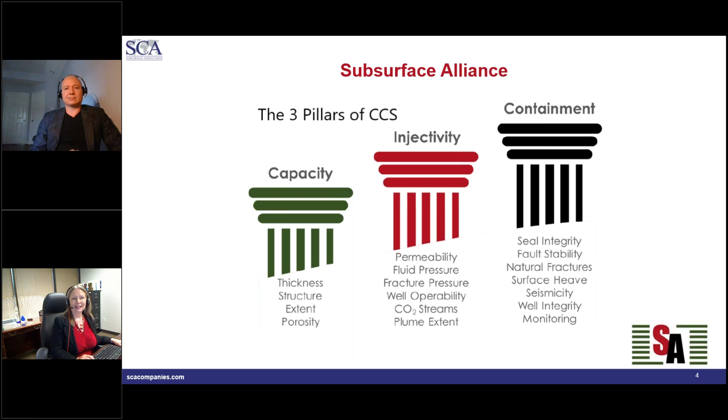Dr. Araujo represents the Subsurface Alliance, and he'll be speaking today on the 3 pillars of carbon capture and storage: capacity, injectivity, and containment. Subsurface Alliance is a network of subsurface specialists who have worked together and today offer comprehensive subsurface solutions in a team-of-teams approach. In this case, we'll be talking about CO2 storage, but there may be other topics related to geomechanics in which you'd like to employ their expertise.

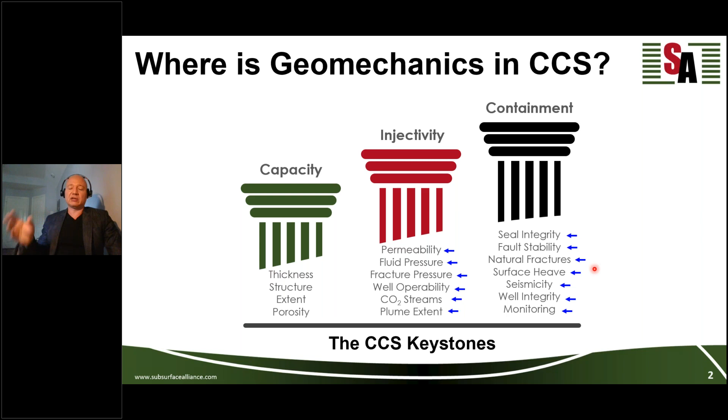So to give an idea of the guidelines or recommendations: in the United States, the EPA, or Environmental Protection Agency, has established in its 2013 document for Class 6 wells some recommendations and requirements, which are actually the most strict when compared to regular oil and gas wells.

For example, there's a topic, 2.3.6, on geomechanics characterization and what type of data to collect. They mention a lot about fractures - how you detect them, how you should characterize them. You should have a good understanding of your rock deformation and strength, because operations you're doing will increase pressure and change temperature, and these things put the rocks under stresses that can become excessive.

If it becomes excessive, we're going to go into a rock failure, and we don't want that scenario. So the in situ stress field is a primal type of geomechanics feature, because without the geomechanics in situ stress field, which is the vertical stress and the two horizontal stresses, we cannot really do the calculations that are required in geomechanics, like the cap seal integrity, the fault stability, the well integrity.

So we need to understand the in situ stresses, which includes also the pore pressure, not only in the reservoir, but also in the cap rock. So here are the EPA guidelines, and I'm sure all the countries have similar, different, or maybe more restricted recommendations. When it comes to that type of data required to characterize every single element of the geomechanics model, the EPA also provides a good list of data and modeling that should be done and carried to be included in the permitting process of a CCS project.

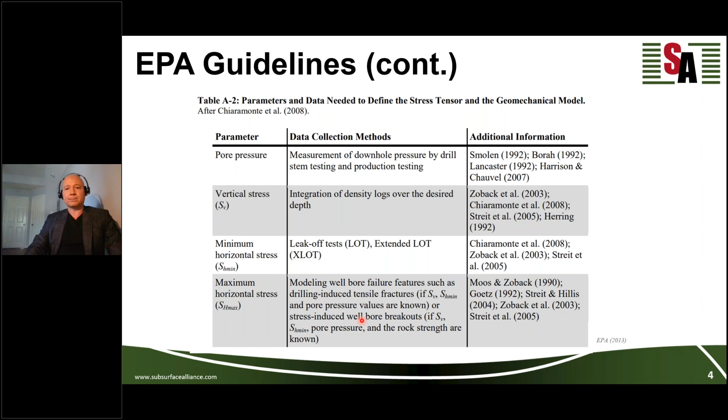And if your reservoir is not extensive enough, you're going to start seeing an increase in the pore pressure. Also, the CO2 comes down with a much cooler temperature than the in situ temperature of the reservoir, and that's going to create a cooling effect. That combination of increasing pressure and decrease in temperature is going to add up to the in situ stresses.

That can create excess stresses that can put the rock at the probability or feasibility for failure in both tensile, which can be a fracturing formation. Usually you can see that it's starting near the wellbore, but it can also start away from the wellbore if you have, for example, a faulted region or naturally fractured region, and that can be facilitated by this increasing pressure.

And if you have minor faults that are really maybe not even visible in the seismic data, for example, and those faults get activated by the increased pressure or decrease in temperature, you can have migration outside of the reservoir into the cap rock, or maybe at the shallow formations where you may find some ground potable water, which is not really desirable.

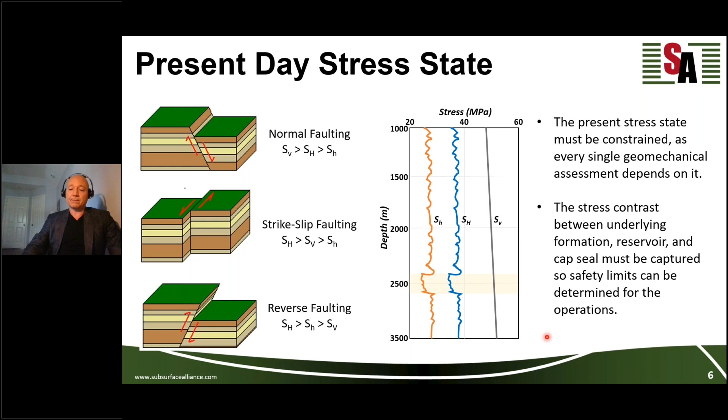Also, and very important, if we are going to do CCS in depleted reservoirs, we need to understand how much the pore pressure is right now and how much it was in the beginning before that field, that reservoir, was depleted, because this delta P in time has created delta stresses which we need to account for. So we're going to start operating a reservoir that's not at virgin conditions anymore, and we need to understand that.

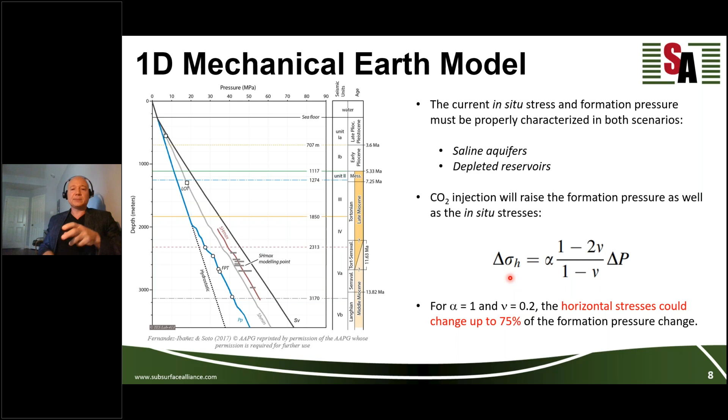Maximum horizontal stress orientation is usually determined by looking at borehole image data like FMIs or other types of image data, where you can identify borehole breakouts or drilling-induced fractures. This is very established technology in the oil and gas industry, and most wells today collect this data - not exactly for the purpose of geomechanics, but we take advantage of its availability to find out about the stresses.

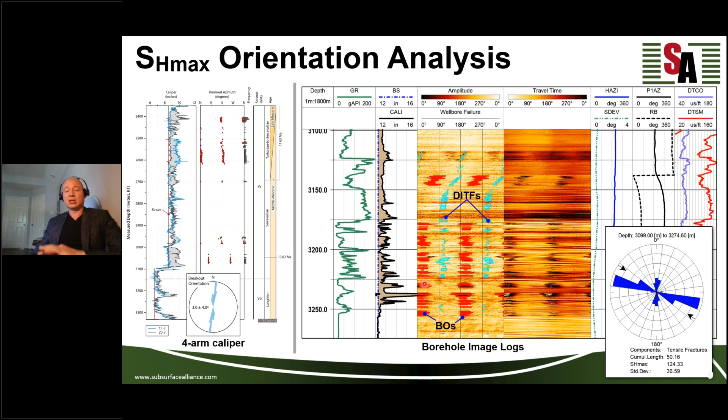For example, this is the orientation of the maximum horizontal stress given by the orientation of tensile fractures that have been observed here, and also the breakouts, which are 90 degrees apart from the orientation of the drilling-induced fractures.

Looking into the rock mechanical properties, we need to understand how these rocks are going to deform, and ultimately what is the maximum strength that these rocks can exhibit once we are making changes down there in the subsurface.

Usually we take core pieces of rock to the lab, and we simulate there in the lab a loading stress on those little plugs or samples of the rock, matching the expected range of stress we're going to see down there in the subsurface. And then we determine how strong that rock is.

So this is something that a good project should extract core for - geological properties of determining porosity, permeability, but also the mechanical properties.

However, not only the rock in its in situ condition matters. If our primary rock in the reservoir is going to intake the CO2, we may have changes in the composition of the material because the CO2-brine environment creates an acidic situation. That acid may start destroying the cementation between grains, which will result in reduction of the strength of the material.

That excessive pressure created a scenario for fracking the well unintentionally, and that fracture became uncontrolled to the point that it somehow connected to these major faults. The faults and fractures combination found a way to propagate and reach the sea floor, because the excess pressure at that depth was enough to reactivate the fault and propagate all the way up to the sea floor.

If I may play this video, you see a very nice ROV image when you drop the robot to capture it. That's the signature of the fracture at the sea floor, and what you see are bubbles of oil coming from that fracture. This is the result that by the end of the next day, you can really see a sheen of oil floating around in the ocean.

So we don't want that scenario, because if our intention is really to keep our CCS safe and with high integrity, we need to keep the CO2 down there in the subsurface. We cannot allow for this, because it would compromise the main objective of the project.

Speaking of a real case here of a CCS project, this project called In Salah is in Algeria, in Africa. It's a well-known project. There are dozens, maybe hundreds of publications on this project, not only geomechanics but many aspects. But you can find a good chunk of geomechanics, because there are features and situations that have been extensively studied.

For the purpose of having context on how we sit in relation to the geomechanical environment, we are under a strike-slip faulting regime, where the vertical stress is our intermediate stress, and there is a great stress anisotropy in the horizontal plane. The direction of the minimum stress has been characterized as northeast-southwest, and here are pretty much the magnitudes that some of the studies have put together to come up with those numbers.

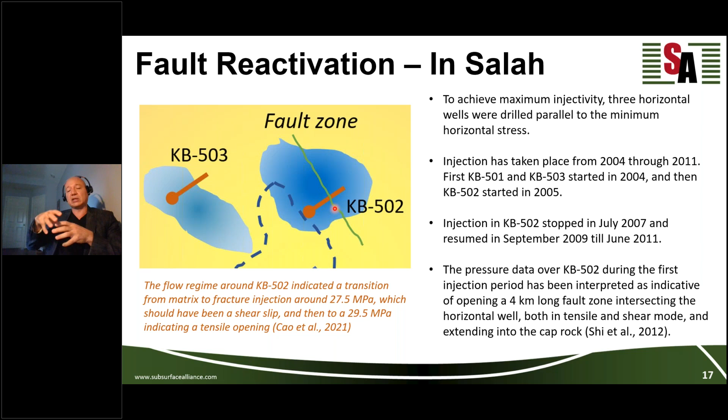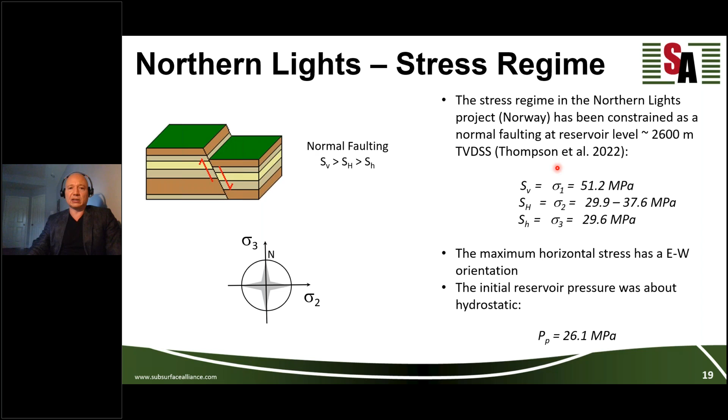The authors of this study were really concerned about the thermal stress impact on the operations for the lifetime of the field. So what they did was a finite element simulation that coupled the thermal-hydro-mechanical process, in other words, temperature, pore pressure, and stresses together.

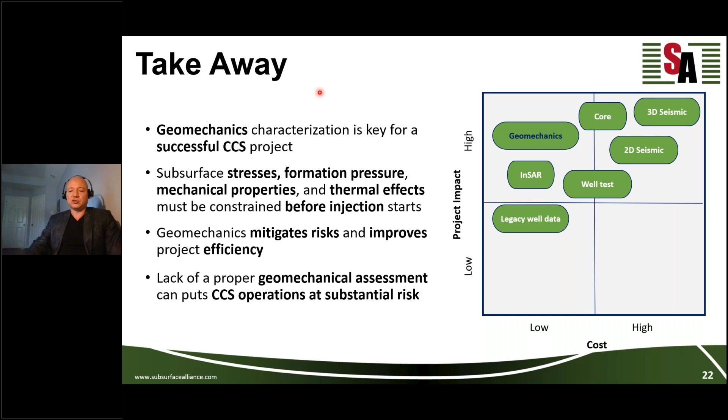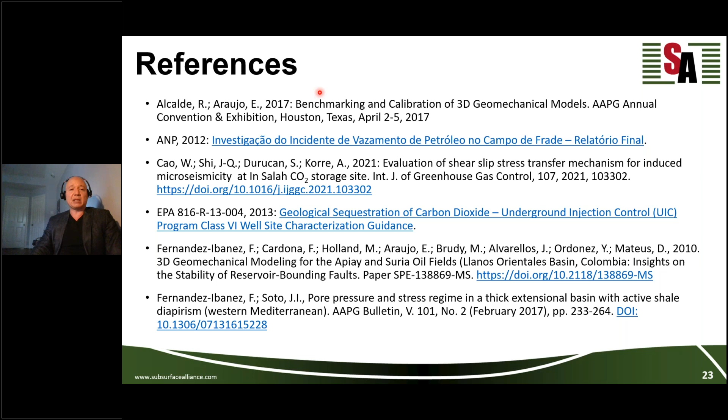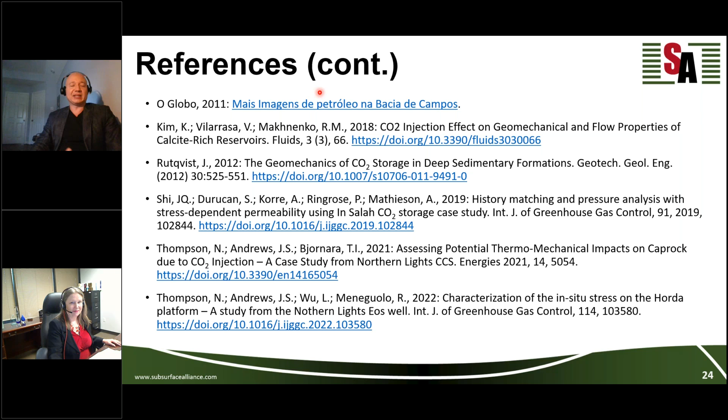I just want to go briefly through the references here. If anybody is interested to check some of the features that I mentioned, most of these papers are open source, so you can download these links and read a little bit more about these studies. There are many other features I would like to cover, but our time here is really limited, so I would like to take questions if I have some. Thank you very much.

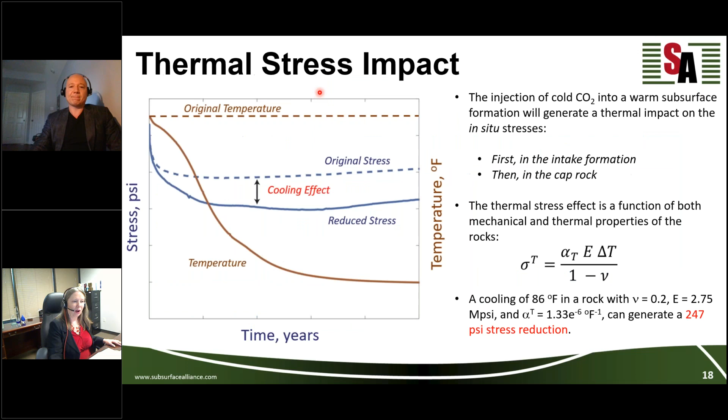So here's our first question. Could you expand a little more about the alteration of the mechanical properties of the rock? Which property is more affected and how to minimize the alteration?

And also the deformations - so if you're expecting to see a deformation of X, now you may have 2X because your Young's modulus has dropped quite a lot. So in terms of properties that will change, both ultimate strength and deformability are going to be impacted. But if you have a sandstone that's more quartz-rich, you're not gonna see that much. But if you have a sandstone with a good chunk of calcite, or a siltstone with more minerals prone to alteration, that's going to be the case.

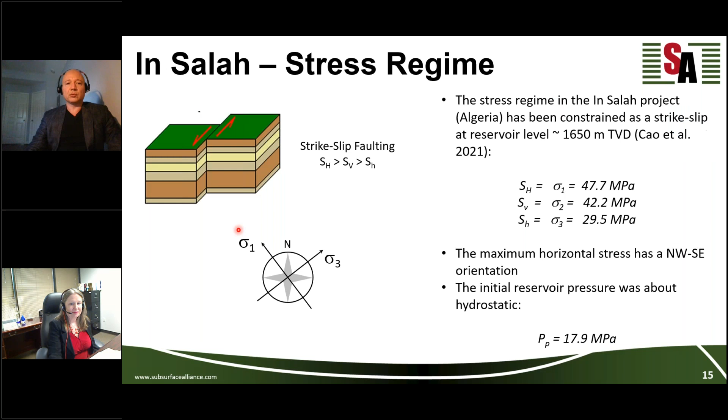How could you estimate the seal of the cap integrity since the reservoir and seal above have different gradients? Very good question. Here we're speaking about mechanical integrity, compared with the regular seal capacity that in oil and gas exploration usually refers to capillary entry pressure. We're not talking about that scenario here. We are talking about a more hardcore mechanical scenario.

So eventually, the stresses in the cap rock are not the same as in the reservoir, because usually this is a shale and this is a permeable formation like a sandstone. Because of that difference in flow properties, the stresses and pore pressure evolve at different paces and rates. That's why it's so important to characterize both. We have to run well logs through the overburden and the reservoir, take core from the cap rock and the reservoir, test both, and any models have to include both at the same time. A simple reservoir model that turns off the cap rock for flow permeability is not going to tell us much in terms of stresses, because we're just making an assumption.

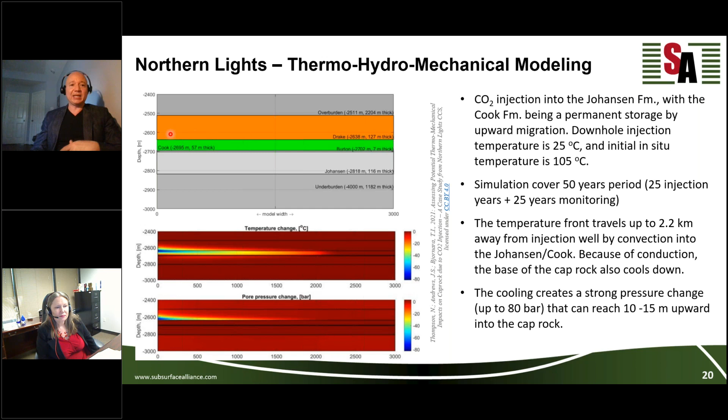You assume your cap seal is a shale with low permeability, so you're not going to have flow here. However, in terms of geomechanics, we need to include that. As you see in the results, injection into the reservoir, because of thermal diffusion into the cap rock—just conduction—is going to change the stresses here. So we do need to take tests, measurements, and modeling in both. That's the way we do geomechanics, so you can put numbers and quantification, not really in terms of quality, but really in amounts.

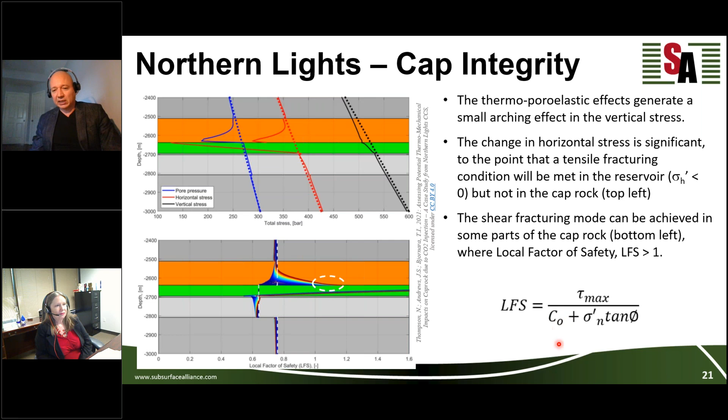Next question for the LFS calculation: how do you assess the parameters for cohesion and coefficient of friction? Very good question. If you do have core—and in this case this study has been extensively studied, there are many other publications out there—they do have core tests, a triaxial type of test, for these two parameters. If you look at cohesion and this angle here, this is what we're going to find.

Next question: how does one monitor the success of CO2 injection? Is it recommended to run 4D seismic, or are there other tools you can use to monitor the plume? Excellent question. Yes, in terms of monitoring, 4D seismic is a way of doing it, because you can really see how your plume is extending. Let's say you assume that the limits or boundaries of your container are around this area in your model, in your characterizations, but we always have uncertainties. Monitoring by time lapse is a way of doing this.

The other way, and a much cheaper way, is satellite imagery. If you've specified that your container has a certain dimension, you know the amount of volume you're pumping inside that container creates an expected displacement, or no displacement, at the surface. So if you start seeing things that disagree with what you expected—for example, if I'm not seeing a ground heave in the satellite image—it seems that maybe my reservoir extension is greater than I thought in the beginning.

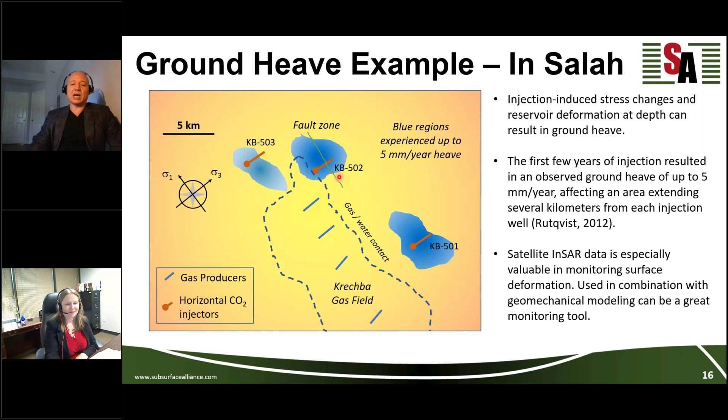You mentioned that CO2 can destroy the cementation in the reservoir. How fast does the reduction of mechanical properties happen when exposed to CO2? Well, I don't have a rule of thumb here, but that will really depend on the amount of calcite or more reaction-prone material. I don't recall off the top of my head how long these experiments took, but that should be mentioned in the reference, and here's the reference for us to check later.

But we can relate this to a home experiment we can do. We can get some rock pieces, like calcite rocks, and dump them into, I don't know, white vinegar, and see how fast that goes. When taken to the lab, this gives you a notion of how much that limited sample of rock is going to be altered, because at the beginning you can measure everything.

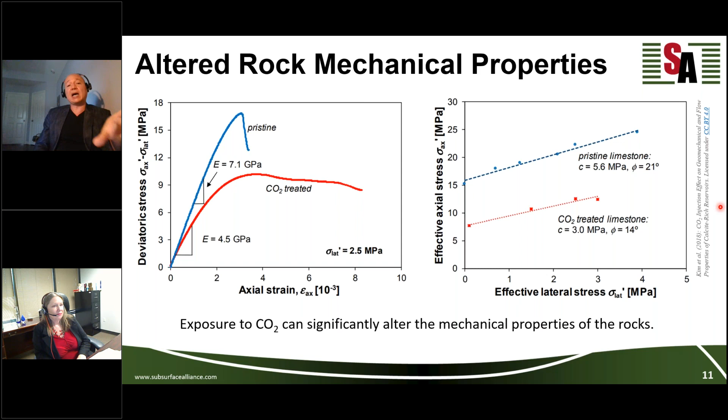You can measure porosity, and actually in this paper they measure two things. I'm just highlighting the geomechanics, but the title of the paper is really about the injection effect on geomechanics and flow properties. They also measure the changes in permeability and porosity.

So in that amount of time that they immersed the rock, like days or weeks, they can see how much material was destroyed. And actually I remember in the paper they mentioned they have an inlet and an outlet in the sample, where the fluid is coming in and where it's going out. They realized that the dissolved material at the inlet was actually deposited at the outlet. In other words, you may enhance your permeability near the well, but you may start losing permeability as those fines that have been released are transported by the injection.

So later, you're going to decrease your permeability, which may favor the fracking of the formation because now you have a less permeable rock, and then the pressure can increase faster than you expected. So that's not really a rule of thumb, but those things can be quantified in the lab.

Very complex. We've been talking about CO2. Have you evaluated the leakage mechanisms due to hydrogen storage projects, both injection and withdrawal? Do you have any experience with the geomechanics effects of hydrogen? No, that's a good question, and actually I don't recall seeing any published work done on hydrogen. I think hydrogen has become a little more popular in the last couple of years, and if there are studies, I'm sure there are studies ongoing right now, but I haven't seen one published yet. There should be some.

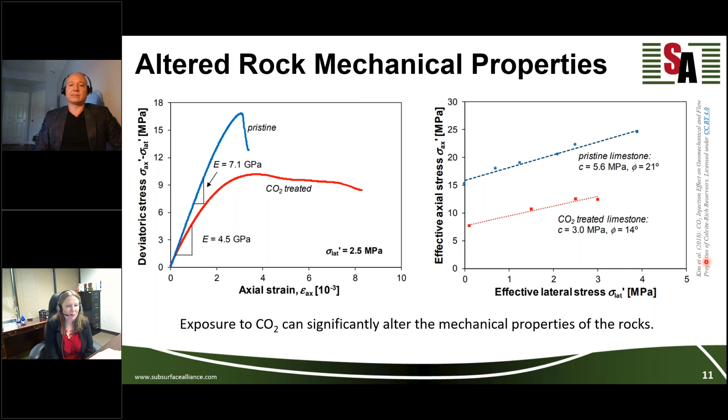The 4D seismic at Sleipner Field shows barriers have segregated the CO2 into layers, possibly increasing the storage. How could geomechanics analysis characterize the potential for these types of baffles and how injection could preserve their integrity? Very good question, and that's why we call it coupled phenomena. As we change the stresses, we may change flow properties too.

For example, in unconventional shales, it's very common for labs to do conductivity tests in the fracture, right? They really see how much the fractures close as the effective stress increases. And then they create permeability equations that reservoir engineers can put into the simulators.

In the case of geomechanics, we can have this in what we call a fully coupled simulation, like a stress simulator coupled with a reservoir simulator. Once you establish those stress-dependent permeabilities, as the flow changes across the reservoir, the pore pressure changes, that feeds back into the stress simulator, which updates the stress and rechecks how much the permeability should change. It's a complex phenomenon, but it can be done, and there are tools available for that.

The next question relates to wellbore integrity. Before the injection of CO2, what study needs to be done to evaluate the cement behind the perforations where oil has been produced for a long time? Good question. Right now there is a big debate about how can we repurpose old wells that are not producing anymore from old oil fields, and can we use them for CO2 injection?

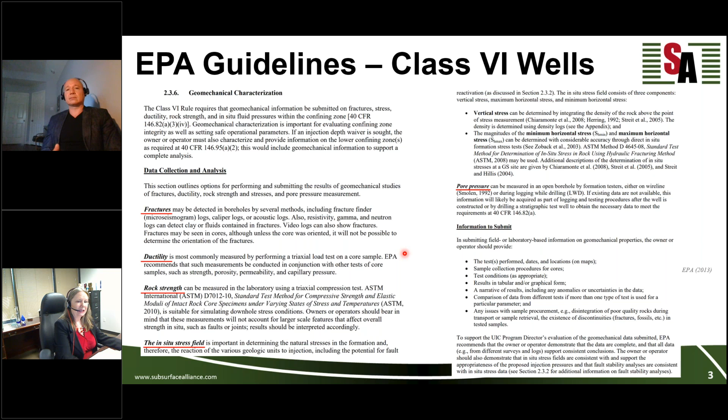When you look at a potential region for CCS, where do you begin in terms of assessing relative potential and safety? I thought this was the lateral extensiveness of the cap rock, and I assume geomechanics and 3D seismic are a powerful combination to figure this out.

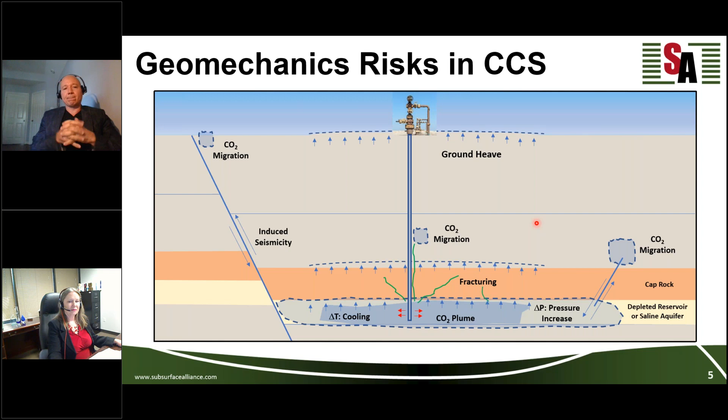For us to come to this point, there are months of work, really trying to put together all the well data, seismic data, reservoir data. But yes, you're right, this is not really isolated. Geomechanics is really more like a bridge that connects engineering to geoscience, and we have flavors from both sides of the bridge. It's definitely a multidisciplinary problem.